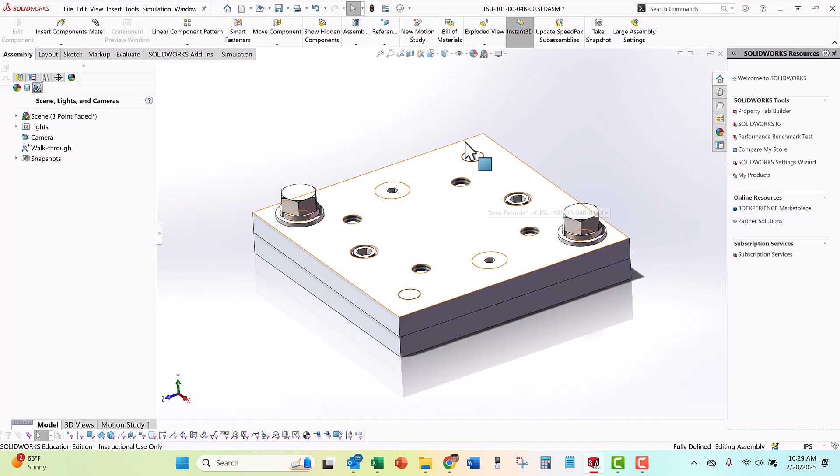Now we need to make an exploded view inside the assembly model. Just open up your assembly model, and you'll start the exploded view by clicking on exploded view while on the assembly tab. It's saying, let's start this exploded view. The first blue box is telling SolidWorks what parts I want to explode out.

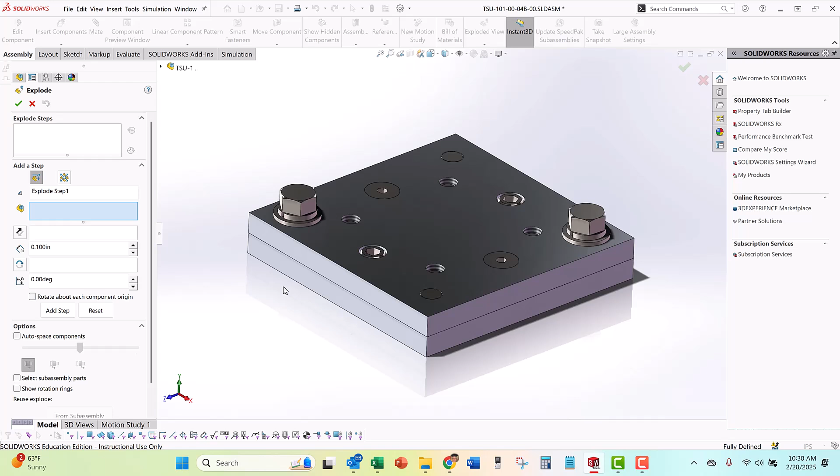My plan is to take the top plate and all the fasteners that stay with the top plate, explode them up, including the pin that goes with it. Same thing with the bottom plate, explode it down with all of its related fasteners and pin, and then explode the fasteners away from the plate, and then I think I'll be done.

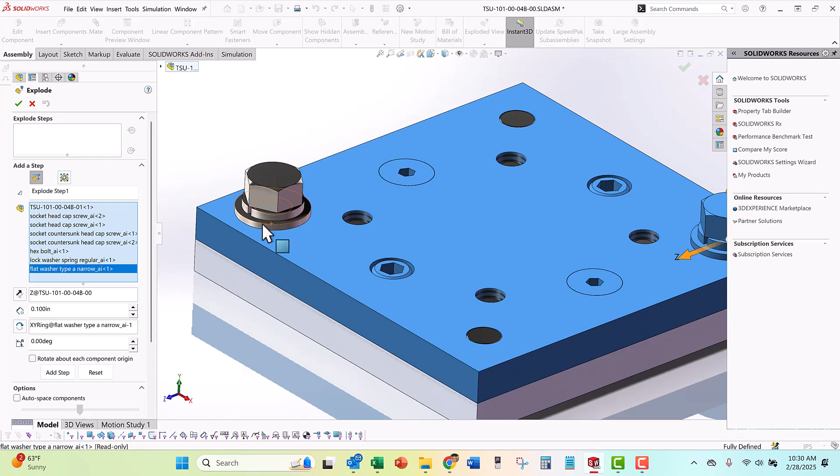So I want to grab all these parts on the top here. I'll click on this guy and control click all these parts that I want to have go up together. So I get those two guys, I need these two guys, I need these three, and control click these three, and I need one pin. This is the pin that's fixed to the plate, so it's going to follow up with the plate. I'm going to control click that one. That's all the parts I need.

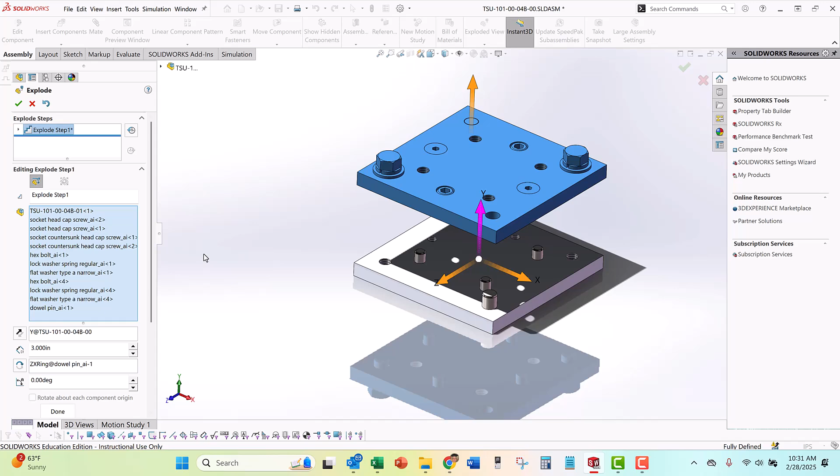Now I'm just going to pull this thing up some amount that looks good, and then say, let's make it exactly 3 inches away. Then you don't hit approve, you say done, because I'm done with this exploded step and ready to do the next one. So I'll say done, and now I'll pick my next sets of parts.

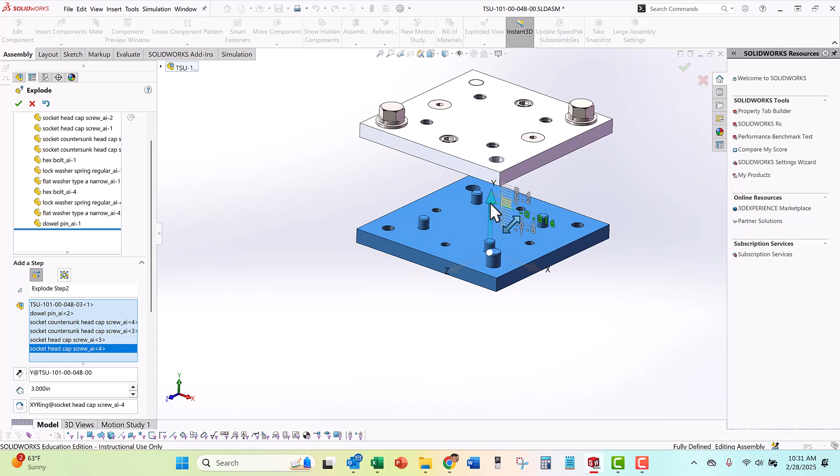So I'll go this guy, control click this other pin, control click my 2 socket head cap screws and my 2 flathead screws. Everything there needs to go down, so I want to drag them down on the y-axis about 3 inches maybe. And again, I'm going to say done.

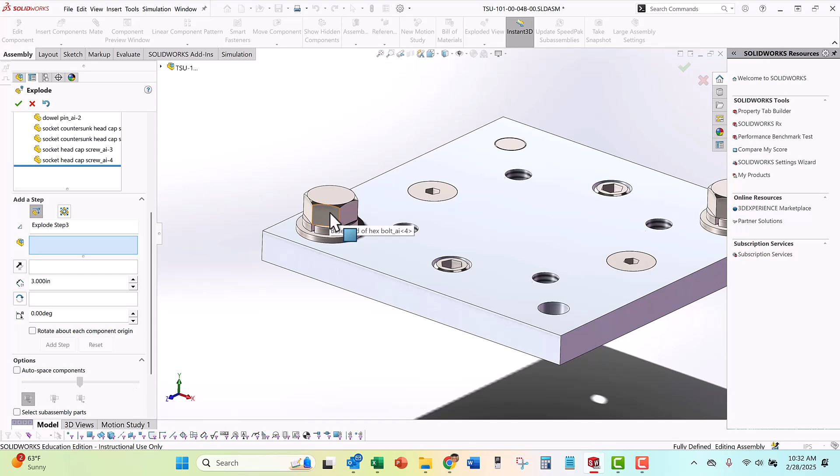Now I'm going to take these fasteners and pin on the top, and explode them up to show how they go into the holes. Maybe the first thing I'll do is grab these fasteners. So I want to go this guy, control click, and then these guys here and these guys here, and then drag them up for another step here. So these are all going up.

Oh, I missed this one right here. That's a bummer, so I'm just going to add it to the list here. Boom, boom, boom. I'm still on the blue box, just adding more fasteners.

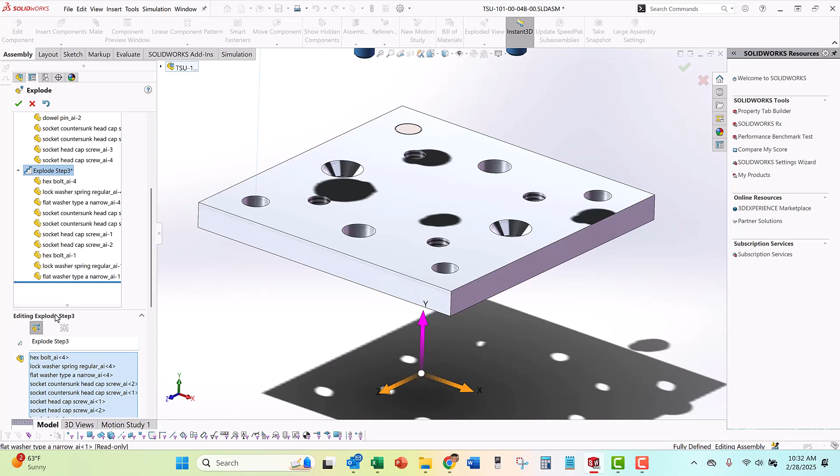So now I got them all, and maybe I'll decide those need to go up. I don't know, they don't need to go up that far. Maybe 2 inches, seems reasonable. Or maybe 3 inches, I can change these later. And I'm going to say done.

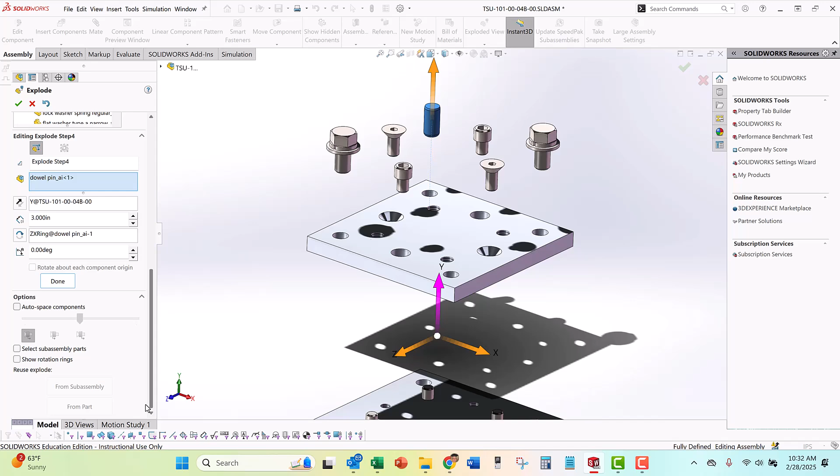And now I'm going to grab this pin and drag him up separately, because he's kind of a separate thing. I'll make him go up 3 inches. Then I want to say done again, because now I got to go to the bottom and do the same thing there.

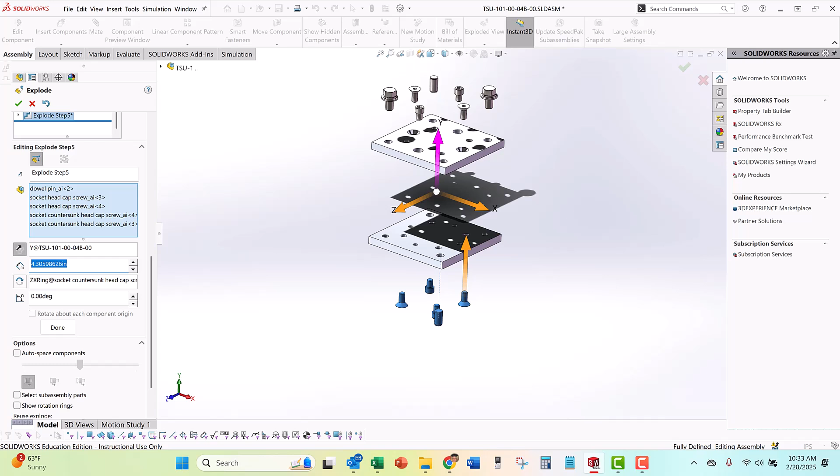So I'm going to pull these away from the plate. I want to go this guy, 4 fasteners, and pull them down, click and hold, drag those down, make it all symmetric, make this 3 inches as well. And I didn't want to pull that pin, I wanted to do it separately, so I can just select him and he'll go back where he belongs.

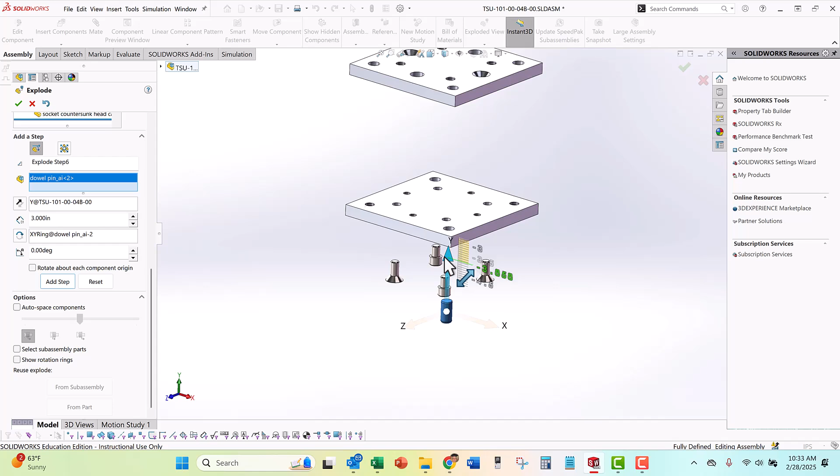So now I've got those going up 3 inches. I'll say done, and now I need to do one more. Maybe I didn't need to make these separate steps, but I did it anyway, so what the heck. So there's 3 inches on that one, and now I think I'm done.

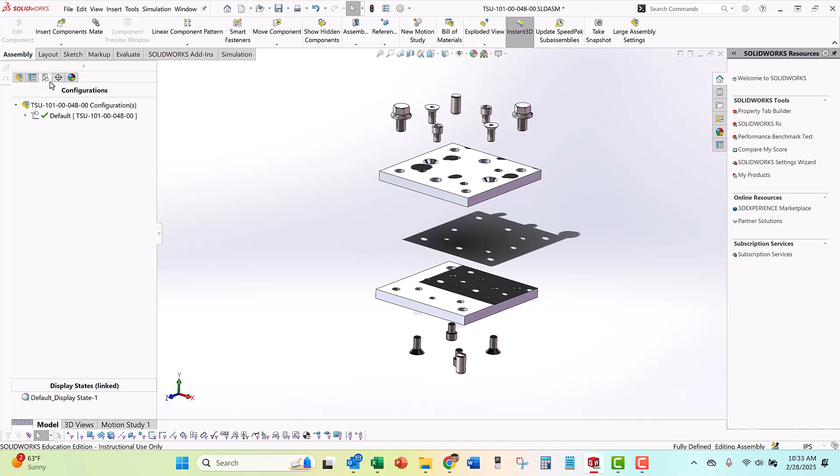So I'll say okay, and I've defined this exploded view in the configuration manager. I'm in the model tab, if I go to the configuration manager and open this up, here's my exploded view I just made. If I double click it, it'll suppress it. If I double click it again, it'll come on.

If I want to go crazy here, I can do an animated collapse and watch it go together, and that might be useful. First thing I'm going to look at is this - these shadows drive me crazy, so I'm going to turn these off. Click the color wheel here, display manager, click this tab here, view scene, lights and camera. Right click on this first tab and say floor reflection off, right click, floor shadows off. That makes it, for me anyway, a little bit more viewable. Shadows bother me. All right, we still got a shadow there for some reason.

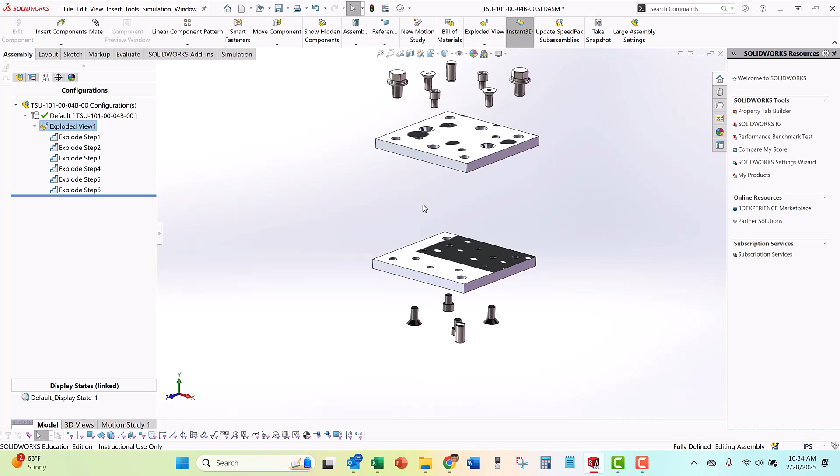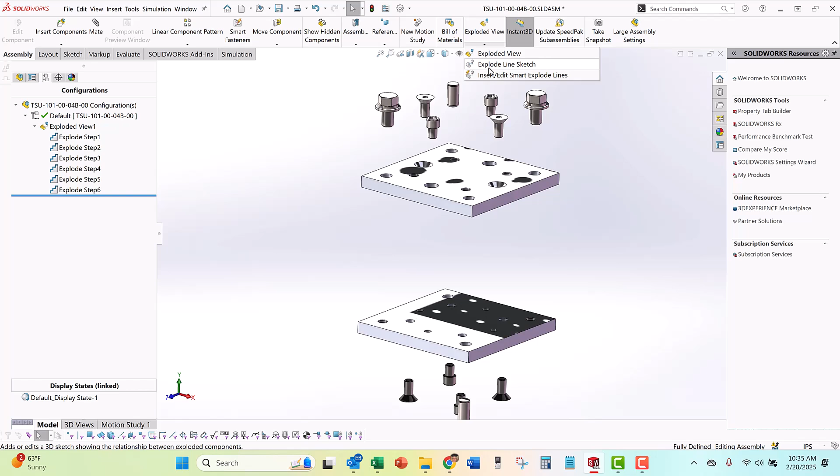But all right, so now the second step is to do exploded - what does it call it - exploded line sketch. So we're going to draw what I call trails on these things to show where these parts go to be reassembled. I want to click on exploded view - or not click on it, I'm on the assembly tab, exploded view, use the pull down and say exploded line sketch. And this makes a 3D sketch of all of these explode steps that I did.

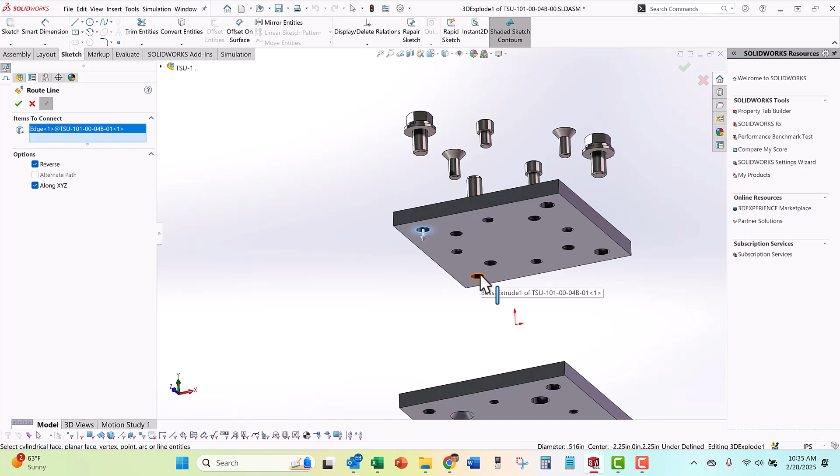So I want this one, and I want to flip the arrow, so I want to have that point down, I think. And I need one for all these corners here. If it's going, the arrow's going the wrong way, you can just click it to flip it. I'm going to click that circle - I don't select the cylindrical feature, I like to select the circle, flip the arrow, that circle, flip the arrow.

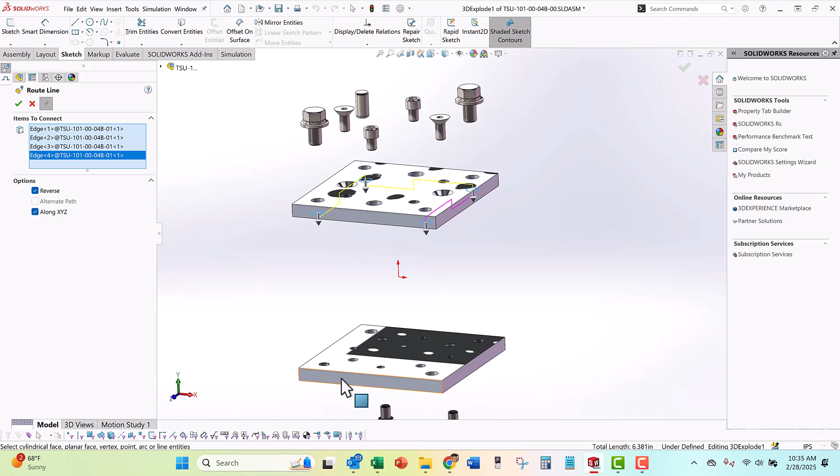I want those to all go down all the way to this other plate here. So now I want to click on this circle here, and that's not what I want. I want to get out of here and start over. That was not good. All right, I want each one to individually go all the way through. I'm going to start over.

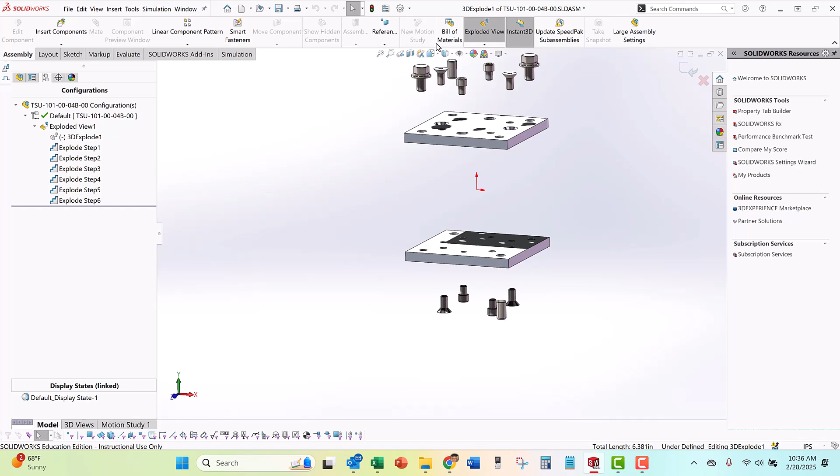I'm going to click again on, where did it go? Assembly. I'm going to click again on explode line sketch. And I'm going to try again here. I want to go from here. I got to do one at a time.

I want to delete this and start over. Delete that 3D sketch. Okay, my exploded view is still there. I'm going to start over, pretend like nothing happened. Exploded view, explode line sketch.

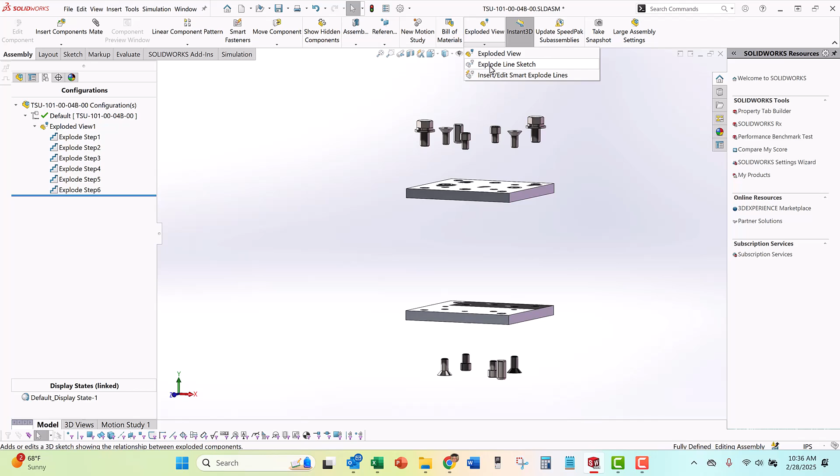I want to grab that circular feature right there. I want to flip the arrow, and I want that individual one to go all the way down to here. And I'll say OK. So that makes one route line. Now I'm going to do the next one. It's waiting for the next one now.

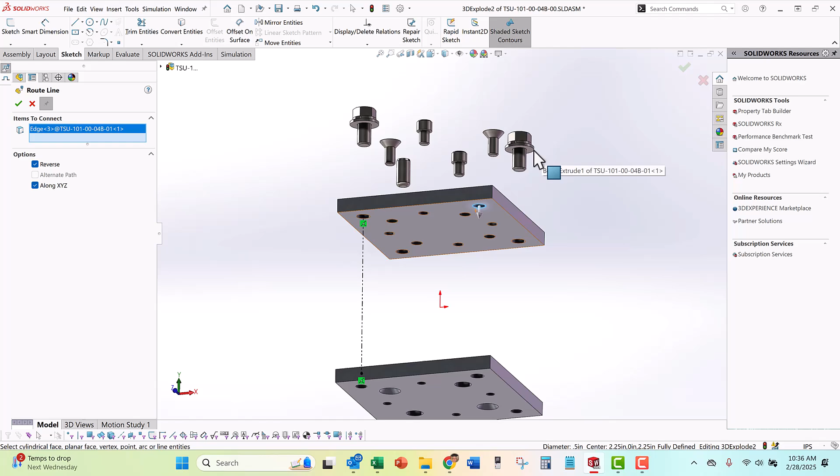I'm going to do this circle, flip that direction, and I want that to extend all the way down to this hole. And do that 2 more times. From here, flip it. This just automates the process of making this 3D sketch.

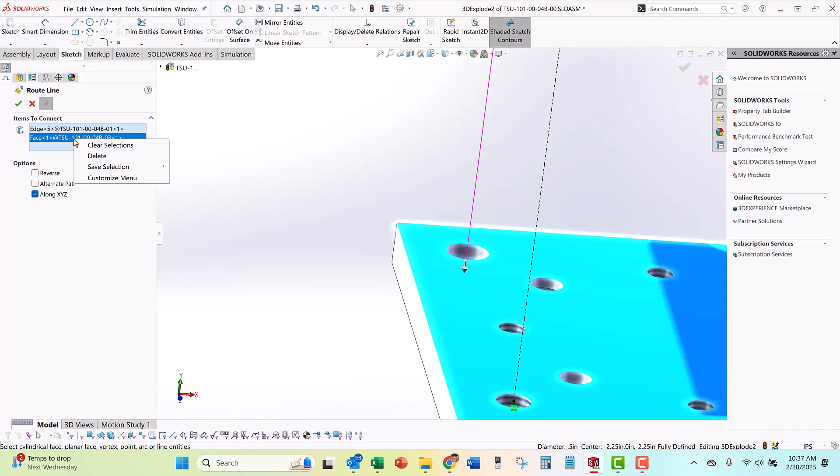I didn't grab the right thing. Delete that. I want to go to the circle. There we go. So click this circle, flip the direction, and go to this circle. And I'm done with that one.

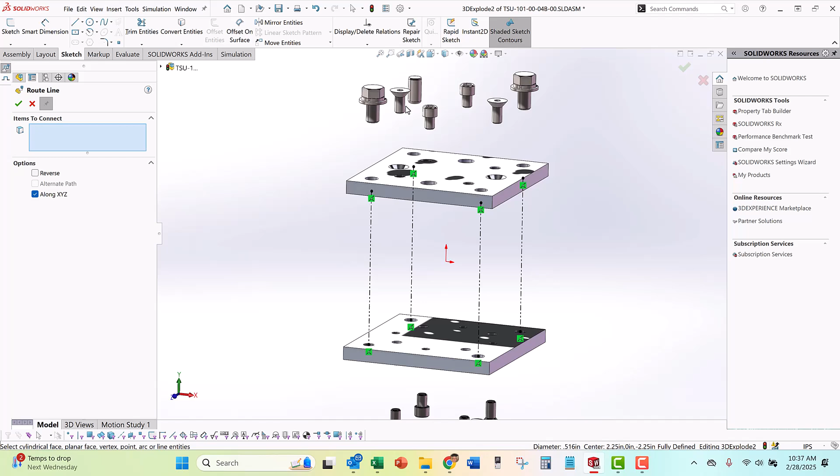Okay, now I'm going to explode these fasteners, and they need to go all the way down to, let's do these 2 fasteners here. So this one is going to start here, flip it, it's going to go down to here. Approve that one. This one's going to go down.

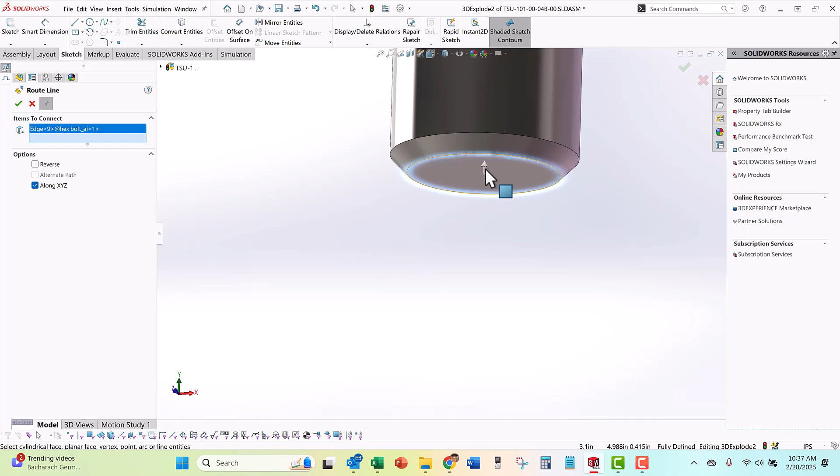Flip that one, if I can find it. Here we go. It'll go down to here. Approve that one, and hopefully by now you get the idea. There's a circular feature to start. It chose the right direction. That needs to go to here. Okay, and I'll do the same thing for these other fasteners.

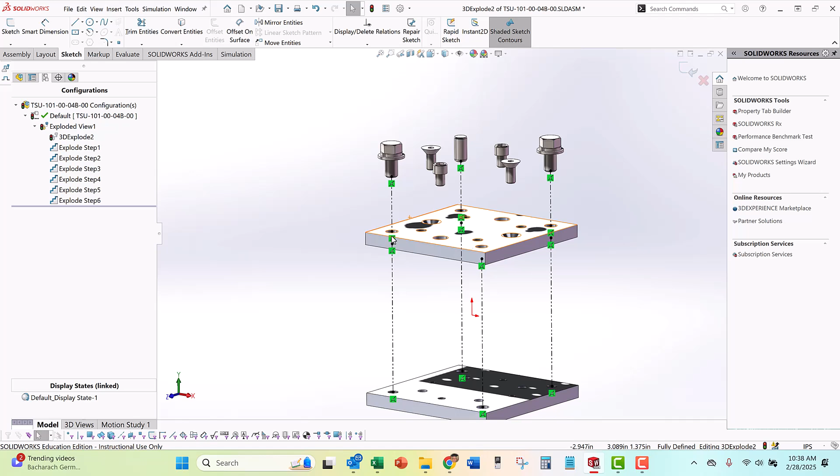Now that I'm thinking about it, it would have been a whole lot smarter if I just would have done one from this circle and just go all the way down to this guy. That would have been a smarter thing to do. Now I've got 2 of them. I've taken twice as long as I should have, but you get the idea.

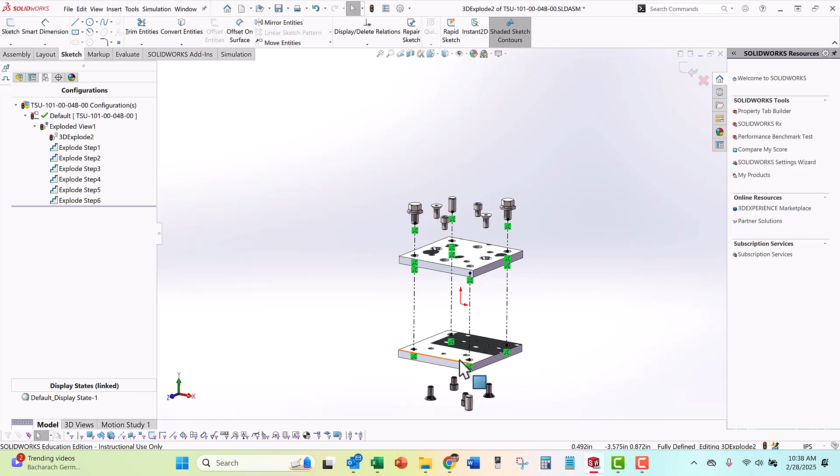So these guys should go all the way down to the threaded hole here. Make all those exploded. All the parts should have a path, a trail that tells you where to go back to. And then these will be the same way, going back up the other way. I'm not going to show you all of them, but you get the idea. So you'll have a nice exploded view when you're done.

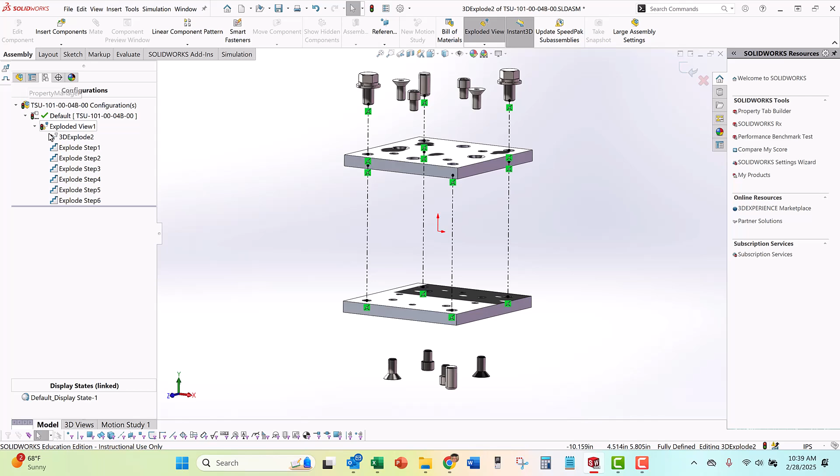So that shows you how to do the exploded view. And when you go back to the assembly model, you're going to be annoyed because when you go back to the model, it's going to show this exploded view. So you got to hit rebuild here for some reason. And when you double click on the exploded view, it collapses back like it was in the assembly model. When you make your assembly model, you want it to be like it looks assembled.

And that's the way it looks now. So if you're in your configuration manager and you've activated the exploded view, then you're going to see it exploded. So if I come back here, double click on exploded view, and then I go back to my assembly tab, my model tab, it's going to show it exploded.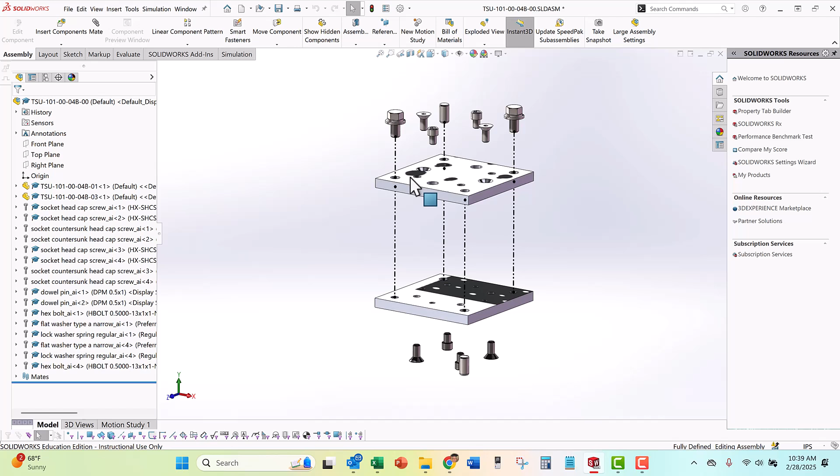So normally this is what I want to show on the assembly drawing, so I can show all the balloons and show all the items exploded. But what you're going to want to do is normally double click on exploded view 1 to deactivate it, and it's back like it was.

Another thing to know is that you can edit all these steps individually. So if I double click, turn exploded view back on 1, if I want to edit these, I can just right click as always and say edit explode step, and I can add, remove parts. I can change these directions. I can make it move in XYZ. I can actually have things rotate. You can do all that stuff.

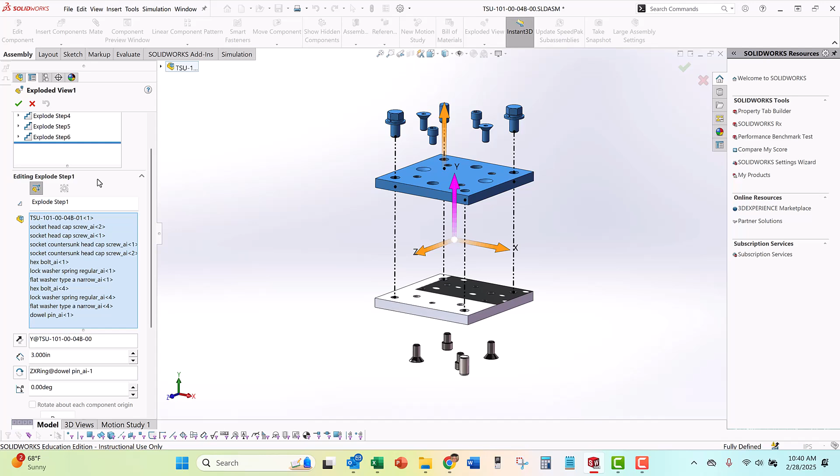So you can edit these individually. And you can also change the order. If you don't like the order in which you did it, you can drag these up and down and reorder them to play in whatever order you want.

So anyway, for this assignment, make an exploded view, looks something like this, and put the trails, I call them trails, they call them exploded line sketch, showing where all the parts go back to be assembled. And then we'll use this in our assembly model.